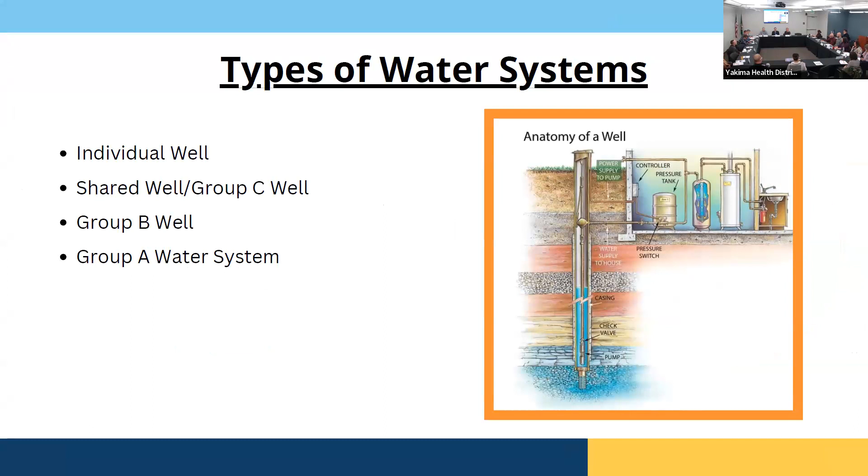So going through, we have four different types of wells or water systems we'll be talking about today, ranging from an individual single connection well all the way up to our Group A water systems, which could serve as a small municipal system, the city of Mabton, for example. Next slide, please. We're going to go in ascending order here from individual wells all the way to Group A's. A lot of the information transitions from one type of water system to the other, so I'll just highlight the changes to each water system as we go.

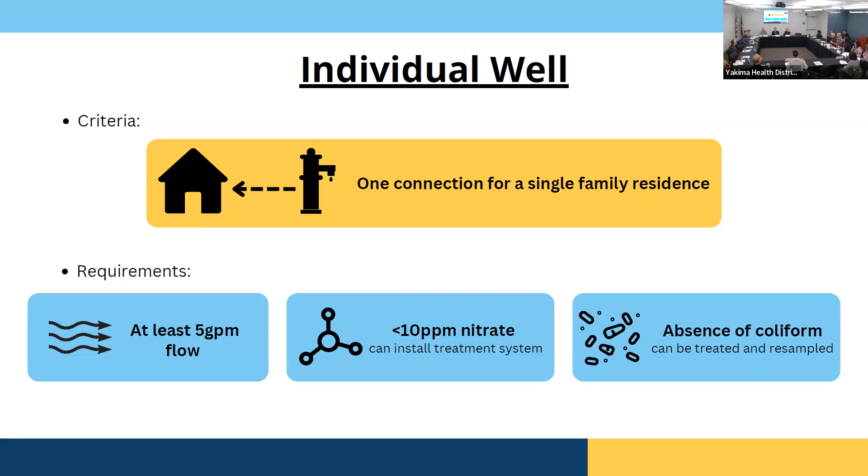For an individual well, the criteria is that it's a single connection well that serves a private single family residence. Requirements for a connection to a drinking water well include at least a 5 gallon per minute flow, nitrate levels below the maximum contaminant level of 10 parts per million, and the absence of coliform. These wells get sampled before they are approved as a drinking water source. Next slide, please.

Our regulatory involvement with individual wells is among the least regulated water systems out there. However, the health district works in partnership with Yakima County Water Resource Systems. We conduct what's called an Adequate Water Determination, or AWD, looking at quantity and quality of a well or each connection to that well - specifically the 5 gallon per minute per connection requirement, the absence of coliform, and nitrate below the 10 part per million limit. Every new use well goes through our AWD process.

We also work in partnership with Department of Ecology on well seal inspections. This is an inspection of a newly constructed well, or during the construction process while it's being drilled. We're looking for the ecology well seal - a clay seal around the wellhead that protects from surface water running down into the aquifer - that it's properly capped, screened, and has its well ID tag number from Department of Ecology installed. Also involved is Yakima County Water Resource Systems for metering each connection on a well, and the water rights that folks have to secure through Yakima County.

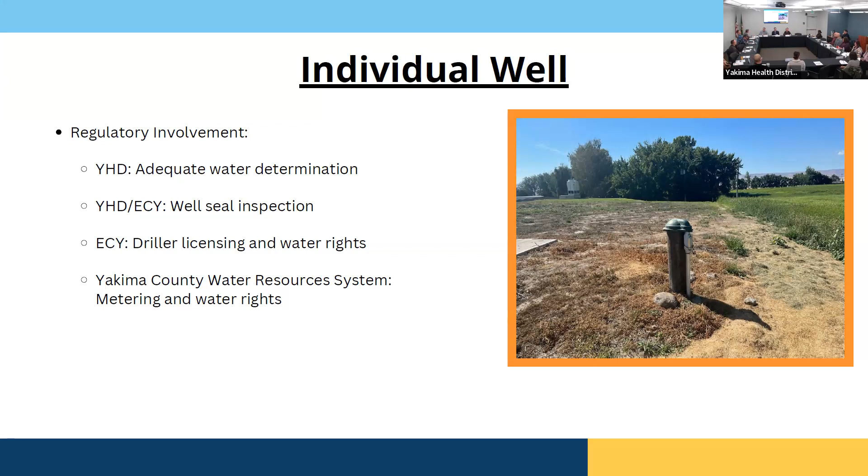Moving into our next water system, the shared well or Group C well. There are slight differences here. The criteria for a shared well is a 2-connection well, serving 2 single-family residences, or a duplex, or a single-family residence plus an accessory dwelling unit, also known as a mother-in-law unit. That's what triggers the criteria for a shared well.

For a Group C well, this would serve a small outbuilding at a place of work used by only a few employees intermittently. It's a single connection, so not a public water system, but a higher level system to serve people at a workplace with fewer than 5 people served per day. It's a new kind of criteria we created to allow more flexibility for places of work to get an approved drinking water source without going through the robust Group B process. They could also qualify for small in-home early childhood learning centers or daycares.

Again, the flow, nitrate, and coliform requirements are all the same as individual wells. The difference here is that we actually conduct a site inspection of the wellhead or proposed location of a new well, per criteria set forth by the WAC. There has to be a 100-foot sanitary control area around the wellhead where there's no possibility for contamination - no surface water, no buildings, no septic systems. We also require legal protection documented on the property title, which are protective covenants securing that sanitary control area - nobody can construct anything or alter that area. There's also a water users agreement, so all parties have legal access to the water, and access easements so all parties or a water system manager have legal access to the well for maintenance.

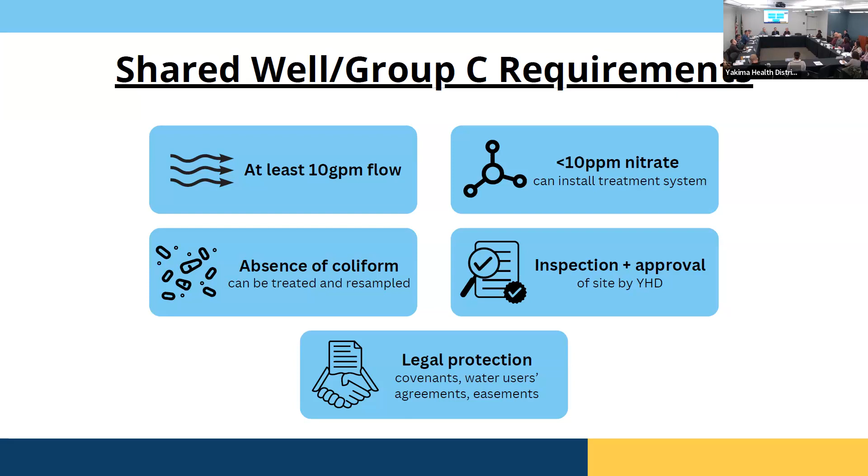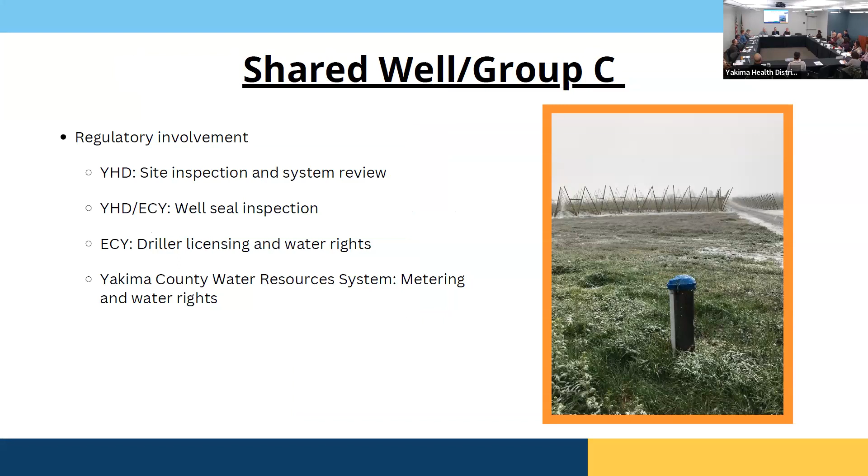The regulatory difference here is that we conduct a site inspection and review the design work for the system, so we have full authority over approval or denial of a shared or Group C well. All the other regulatory conditions are the same as individual wells.

Moving into Group B water systems - these serve less than 25 people for more than 60 days, or 25 or more people fewer than 60 days a year. It gets a little convoluted, but basically less than 25 people on an ongoing basis. On the residential side, it's 3 to 9 residential connections, period - that's a Group B. For commercial connections, we look at how many people it serves and how many days out of the year. These could be used for churches, small businesses, or agricultural facilities on a smaller scale.

Question: in a Group B, is it still just the 5 gallons per minute per connection? Per connection, not per the whole well. Thank you.

Looking into the requirements, we have full authority over Group B designs and reviews, so we do the site inspection for approval. We have a Group B design workbook that must be completed, typically by a licensed engineer - it's not required, but that's the route a lot of people choose to take, and in most cases that's what we receive. We do the full review of that Group B design, and then a post-construction inspection before the system is put into operation.

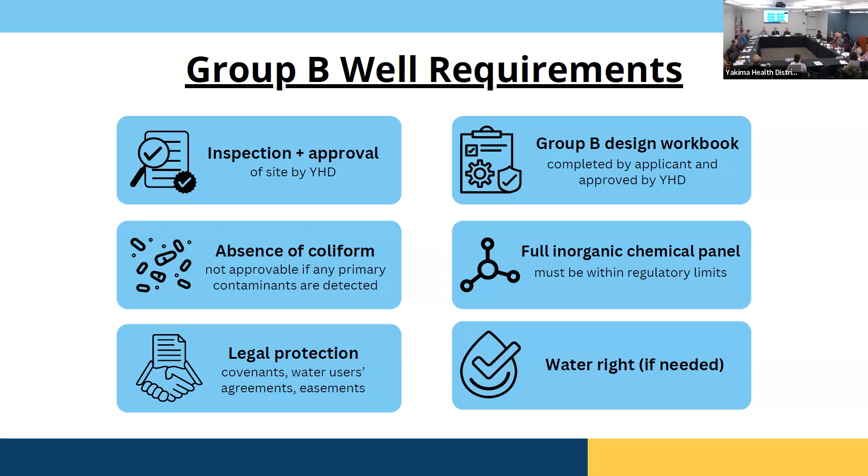And then again, legal protections, covenants, all that, water rights, it's all the same. Next slide, please.

Actually, the regulatory requirements are pretty much identical to a shared well, so we really don't need to go into that. Same regulatory involvement as a shared well, it's just a much more robust review process because we're looking at sometimes a 100-page workbook. Next slide, please.

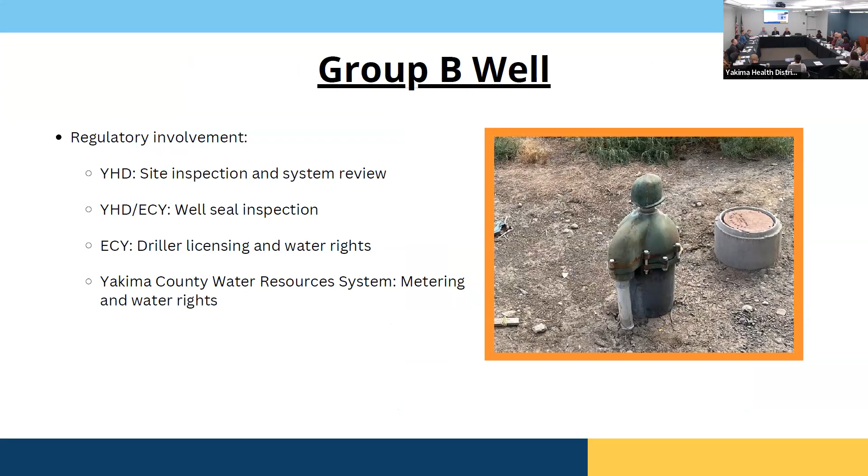Moving into our Group A water systems, I'll preface this with the fact that these are fully regulated by the State Department of Health. The Yakima Health District does not regulate Group A systems, but we do work in partnership on them. The criteria for Group A is 10 or more residential connections, or any number of commercial connections that serve 25 or more people for 60 or more days a year, or 1,000 or more people for 2 consecutive days. A good example of that is the location of Chinook Fest.

Big festival, 3 days long, a couple thousand people a day. Requires a Group A water system.

So there are different types of Group A systems. Community Group A water system is for a residential population, so it serves a housing development. Non-transient, non-community serves the same population, but it's not residential - so a place of work, fruit packing warehouse, large scale commercial businesses, large daycares, those kinds of things. Transient, non-community is a changing population, non-residential - gas stations, rest areas, parks, campgrounds, for example.

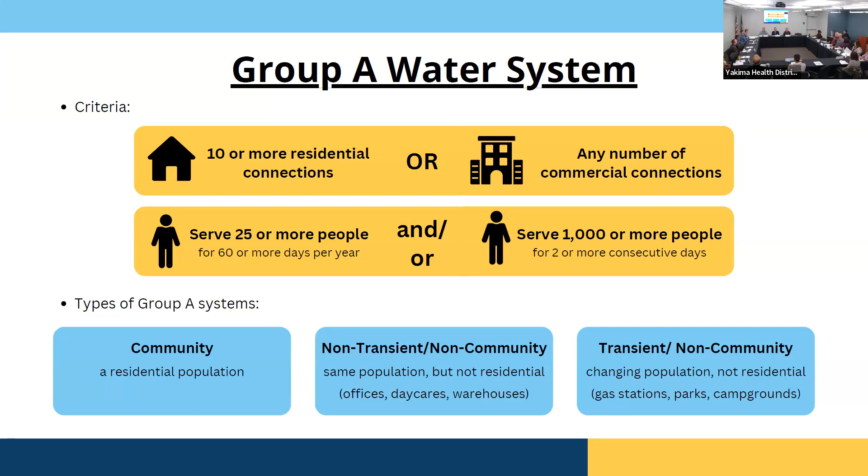So the differences here is that there's still the site approval, the well site inspection needs to happen. It's approved by the State Department of Health. However, we will go out and conduct the inspection, collect data, take pictures of the site, and we will send that to the state for them to make a determination if that's an adequate well site. The design workbook is reviewed and approved by the State Department of Health.

All the water sampling requirements are regulated by State Department of Health. In addition to the full inorganic panel, other samples could be required by DOH. For example, in Selah, PFAS, if it's a known area with a contaminant of concern, DOH could request that there's a PFAS sample added to the list of analytes.

The other difference is routine inspections, we call them sanitary surveys. We partner with the State Department of Health, and our staff goes out and does these routine inspections on our Group A water systems in Yakima County every year. It ranges - one year we could have a dozen, the next year we could be inspecting 40 of them. So they're very in-depth inspections.

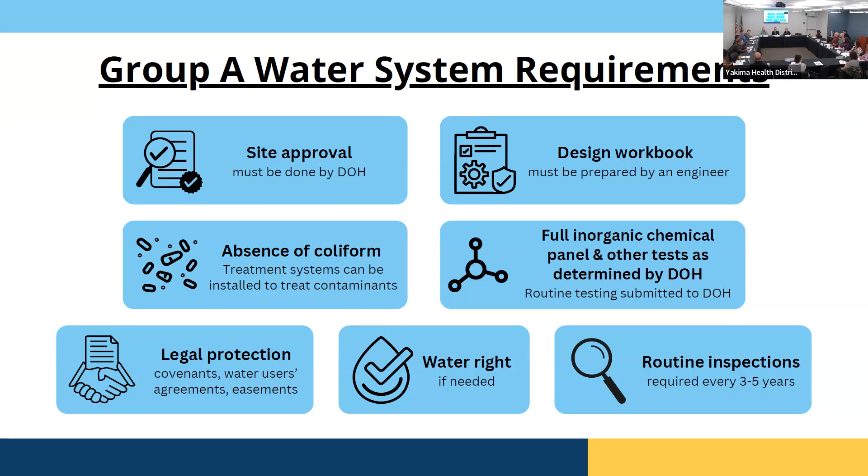We're looking at every component of the water system and the environment around it for possible points of contamination. And these happen - each system gets an inspection every 3 to 5 years based on their performance through the routine inspection. Next slide, please.

So regulatory involvement - we don't have as much regulatory involvement in Group A's outside of the sanitary surveys we conduct. We don't really even make the requirements during that inspection. We write up the survey, we make our notes, we make observations, and we make recommendations based on what we see to the State Department of Health.

They approve our inspection report and then send back a corrections letter to the water system's purveyor to make those corrections. So it's a very fluid partnership, a pretty seamless effort, and we've been conducting sanitary surveys for years. All the other regulatory involvement requirements are identical to the other 3 water systems we've already covered. Next slide, please.

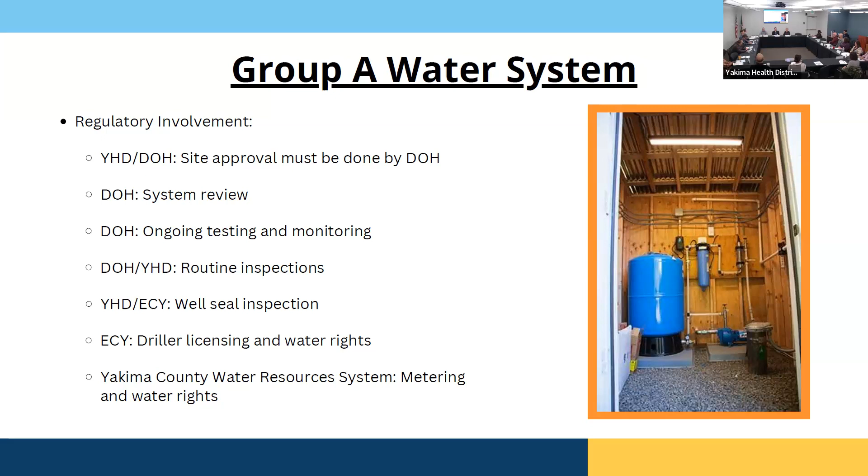So I want to dive back into our Group B programs. As you may have heard, we're working on a draft Group B ordinance for Yakima County. There's 3 different kinds of Group B programs that exist in Washington State. Some counties don't have a local Group B program - they don't exist at the local level.

So the State Department of Health maintains authority, and as I understand it, the State Department of Health doesn't really have a Group B program. So the counties that don't have a program don't have Group B wells.

So what Yakima County currently has is what's called a joint plan of responsibility. That means we are required to follow the Group B WAC for approving Group B water systems. Now, there's limitations to that, as there's no provisions for treating primary contaminants in the Group B WAC. So the health district cannot approve Group B systems that have a primary contaminant present when they take their initial sample. We can't approve treatment - it means the system dies right there.

The next is full authority under a local ordinance. This is what we're working towards. This means a local health jurisdiction such as YHD can add its own provisions to the local ordinance, which gives us the authority to approve treatment of primary contaminants. We would review and evaluate that, and monitor the ongoing sampling of those systems to ensure long-term success of a treatment system that's in place. You can see there are many counties around the state that do have a full local ordinance at the local level. It's something we're working towards, having a draft finalized.

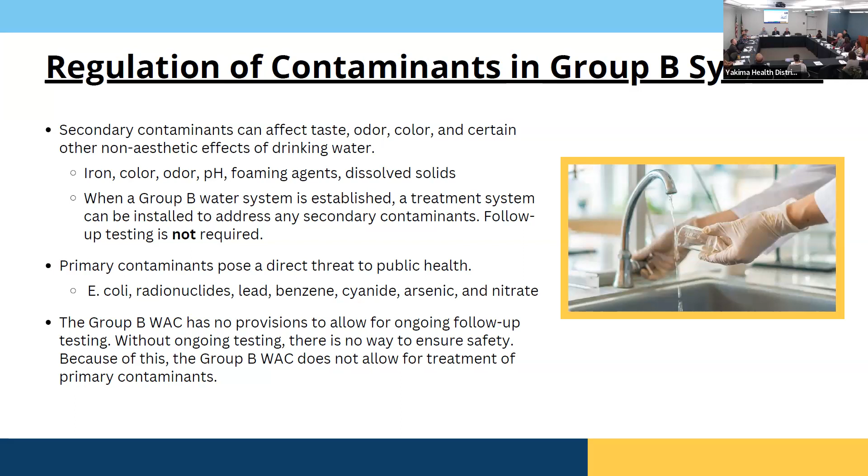So our proposed Group B ordinance, the PFAS situation in Selah really kicked us into high gear of realizing we need to go beyond what we're doing now with our Group B water systems. We need to enhance our services and provide more of a resource to give people options in the development of property, people who have existing Group Bs that need to add treatment. For example, there's a couple Group B systems in the Selah area that are receiving treatment systems paid for by the Department of the Army. We need a local Group B ordinance for those treatment systems to be valid. So that's what's driving this, but recognizing now more than ever, there's more contaminants popping up. We don't know what's going to be next or what area of Yakima County is going to be next, but this ordinance would allow us this ability across the entire county, not just in the current area where PFAS is a concern.

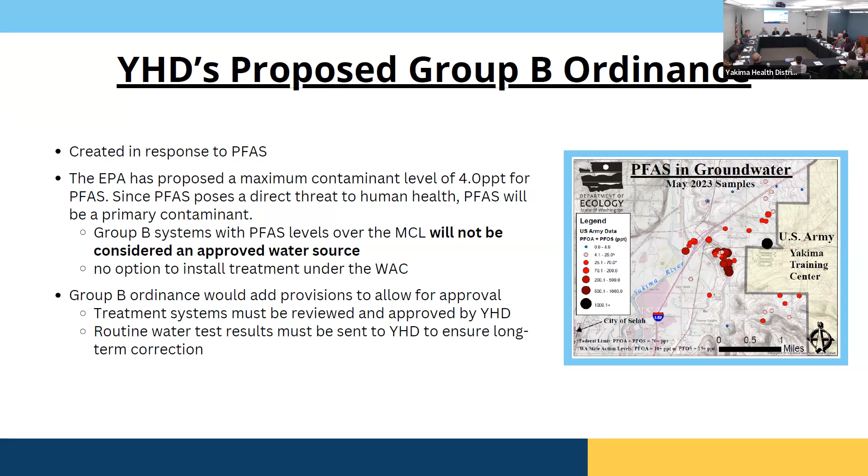I will say though that going to a local Group B ordinance, adopting that, we do get more funding from the state to run that program and pay for some of the ongoing monitoring, water sampling, and more extensive reviews. So it does cover a lot of our staff time. I believe the funding doubles. I don't know exactly what the number is off the top of my head right now, but I can certainly get that. But looking at how this ties into our strategic goals, our drinking water program is one of our mandated services. So if you look at the drinking water program in itself and then take the Group B ordinance as a separate component, we're enhancing our mandated services. We're being more of a resource to the community and bringing more options to the table to keep building progress and public health moving forward, a healthier community moving forward.

This program has secured many partnerships with Yakima County Public Services, the Water Resource Program, partnering with them and looking at quality of water for the water rights, working with ecology on well construction, and with the Department of Health on our sanitary surveys and developing these programs.

So the increasing of effectiveness and efficiency, I'm looking at this more as an effective side. Having a local Group B ordinance would make us more effective in securing clean drinking water for more people in the county. Also, from an efficiency standpoint, it wouldn't hold up land development. It would allow us to keep land development progressing, especially in areas where we have known contaminants.

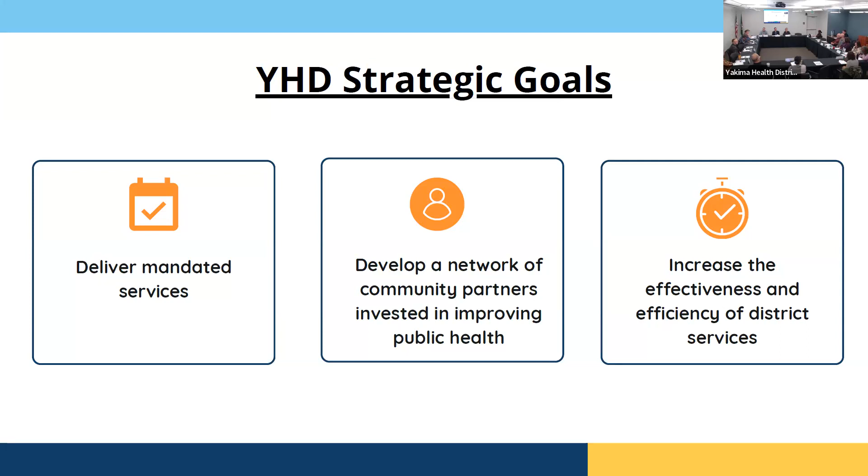Next slide. Any other questions?

Yeah, so just on the idea of the list of contaminants, in the spirit of being able to make stricter ordinances, is there something that would stop us from being able to identify a contaminant in the area and say, hey, we need to add this or we need to address this?

Well, the financial constraints would probably be the number one thing. Because when you add further regulation, you're creating a lot of expense to enact that regulation and then to retrofit the people that are out of compliance. So I think that's probably the major thing.

So, okay, if you didn't make it regulatory necessarily, but just identifying and doing like a public awareness, or saying here's an identified potential problem?

Yeah, we did that with the PFAS situation when it first came out. PFAS is so new, and we're learning a lot about it very quickly, but it's still so new that there really isn't much regulation for it because it doesn't exist on the primary list of primary contaminants yet. There's a large gap between the state maximum contaminant level and the federal maximum contaminant level. And it's hard, you know, we can certainly educate people on the risks of PFAS, but we don't have the authority to say you have to do this.

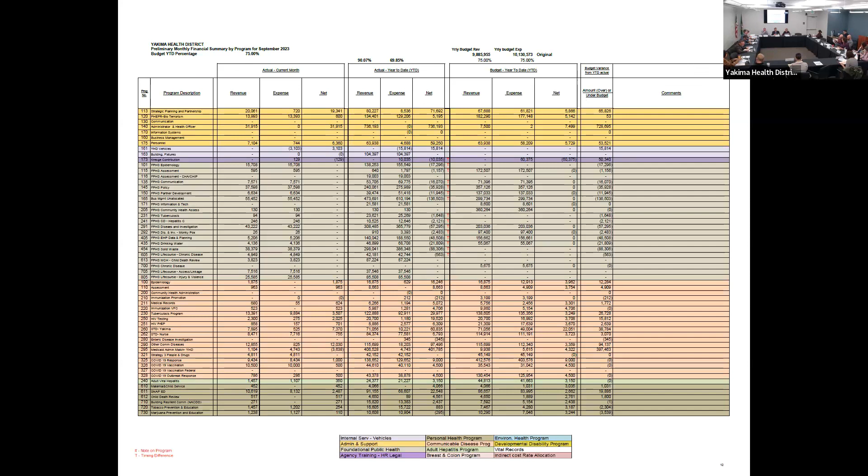Next page. Again, not much to highlight on this section unless there are questions.

Any questions? I swear you've answered this probably 20 times now, but the COVID money for the federal stuff—that's not something we're going to have to return at the end of the year? Yes, because there's about 500,000 we haven't utilized. Correct, it's reimbursement only. So it's available to us, we invoice against it. Will we have that for 2024? No. It's through mid 2024—we have it guaranteed through the end of June 2024, but that's all that's guaranteed so far. Right on, thank you.